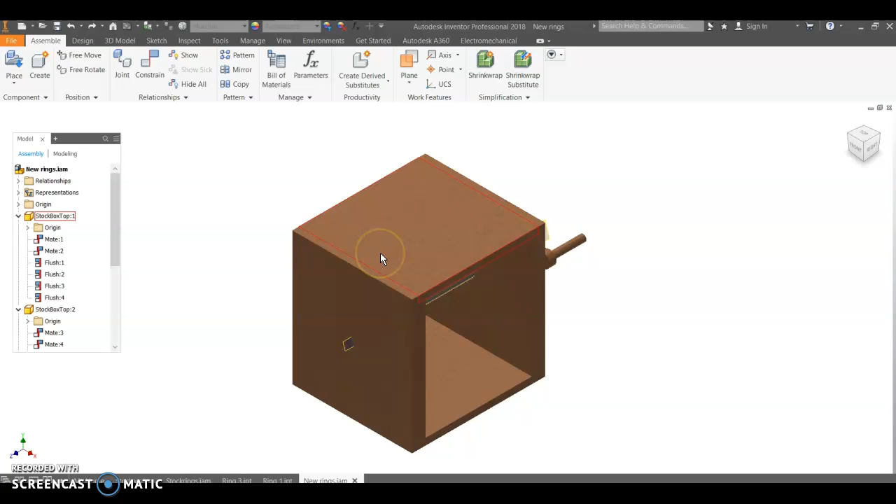Alright, welcome guys. I'm going to set this one up for both the caterpillar and the rings here. I'm going to add 7 holes along the top here, and then I'm also going to add 7 planes along the shaft running underneath, running through the middle, that line up directly through that.

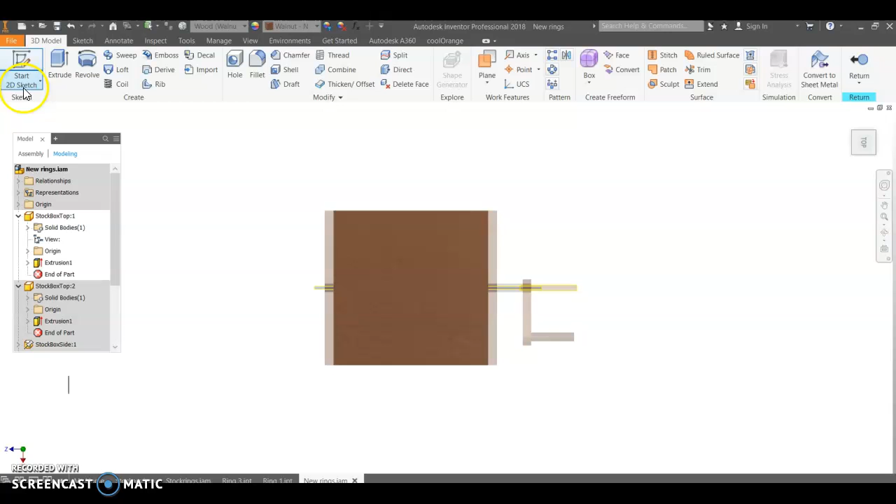In my box here, all I do is double click on that piece right there. That means I can work on just that, and I'm going to start a sketch right there. So that's lined up in the middle. If not, I'd come and find the center - that's 2.5 inches over there. I'm going to go ahead and start putting in some circles.

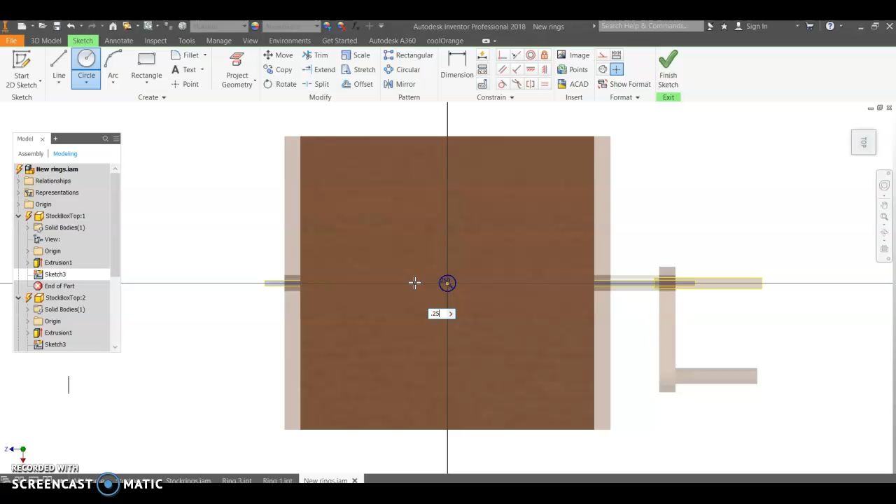I'm going to put in 0.25, enter. I'm going to come over here, 0.25, enter. I'm going to come over here, 0.25, enter, and right here, 0.25, enter.

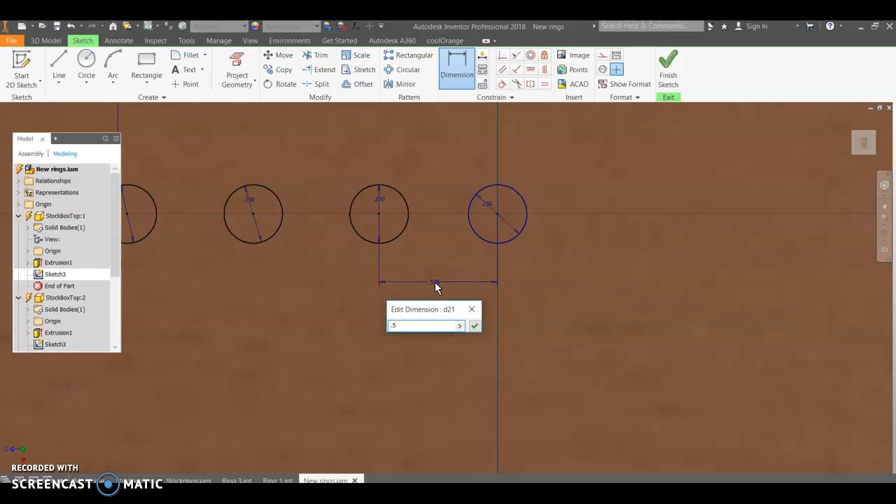I'm going to go ahead and dimension them up a little bit here. I'm going to space them - let's see, I'll put them 0.5 apart. From that one to that one it'll be 1, enter. From this one to this one, put 1.5, enter.

Alright, I'm going to go ahead and mirror those over to the other side. I'm going to mirror this one, hit shift, this one, and I'll put it across the mirror line here. Oops, it won't let me, so I'll come up here to the origin.

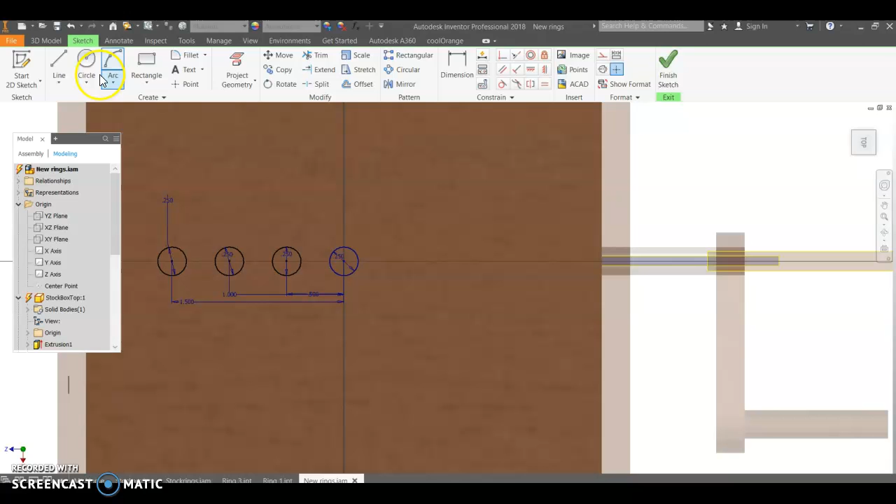Oops, cancel, hit done. I'm going to go ahead and put a line right here down like this, and then I'll go up and mirror this, and this about that line. Hit apply and done.

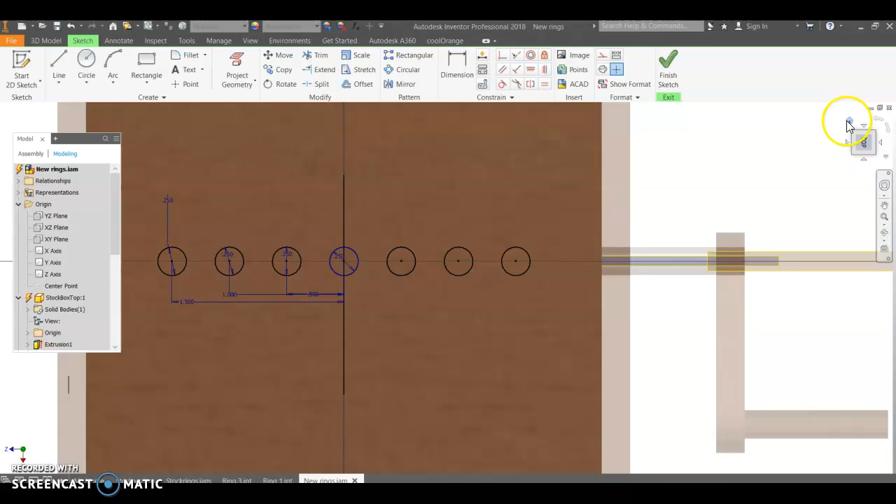Alright, now I'm going to go ahead and finish my sketch, and I'm going to extrude this one, this one, this one, this one, this one, this one, and this one. And I come over here and hit cut so it goes through them, and hit OK. So now I have those holes properly lined up.

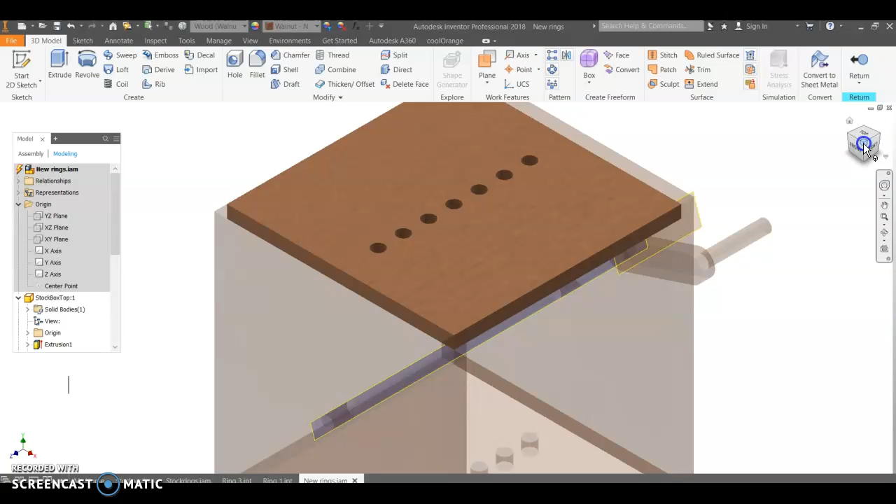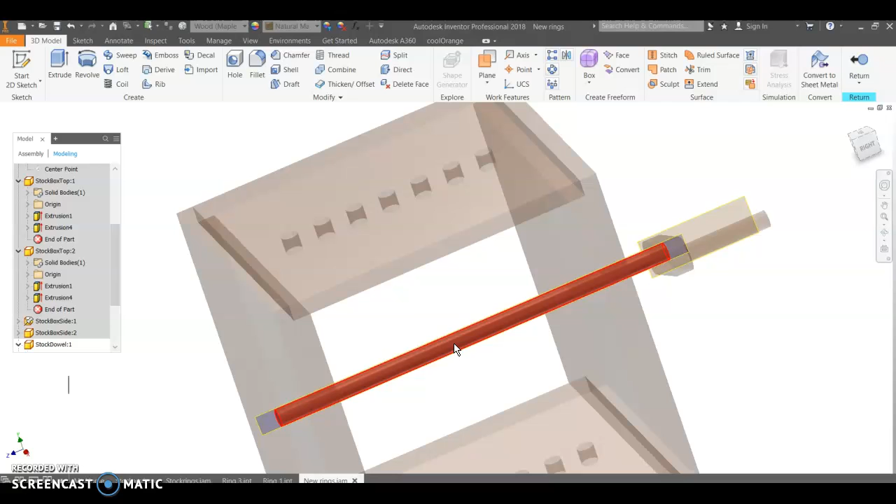I apologize about drawing the mirror line after the fact - I thought I could just use an axis, but it turns out I couldn't. Now what I want to do is go ahead and put corresponding planes that go directly under these, that I'm going to eventually lock the cams to, since I'm in here. So at this point I'm going to work on this, and let's see, I'm trying to think of the easiest way to add planes here.

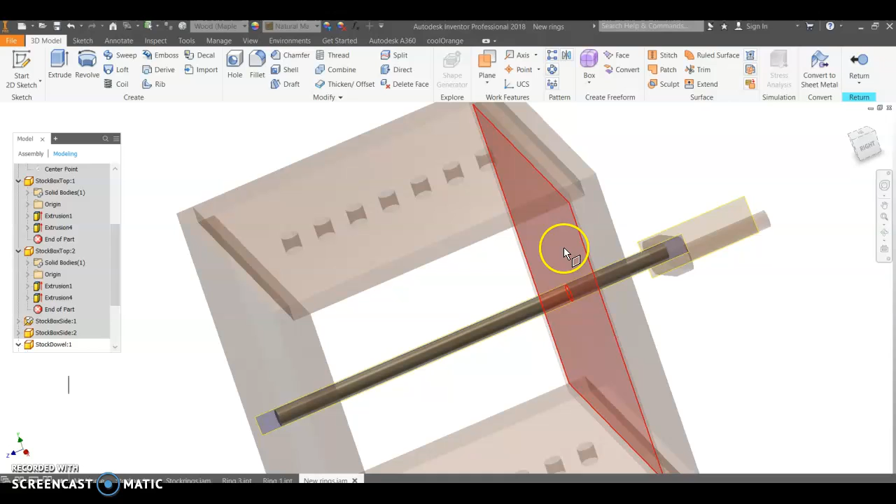I can do a little bit of mathematics in my head here and go quarter. So I'm going to add a plane offset, and I'm going to offset it from this plane. I'm just going to use, I'll come a little further, 0.5, and that one is perfectly underneath that.

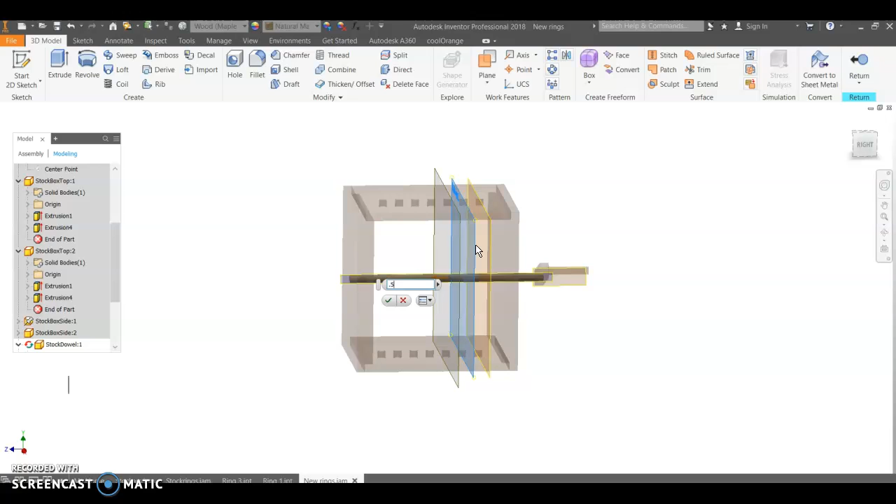I'm going to hit there, and now I'll do that several more times. Offset from a plane, 0.5, enter. Offset from a plane, 0.5, enter. I'm sure there's probably an easier way to do this, but I don't know how, so I'm hacking my way through this.

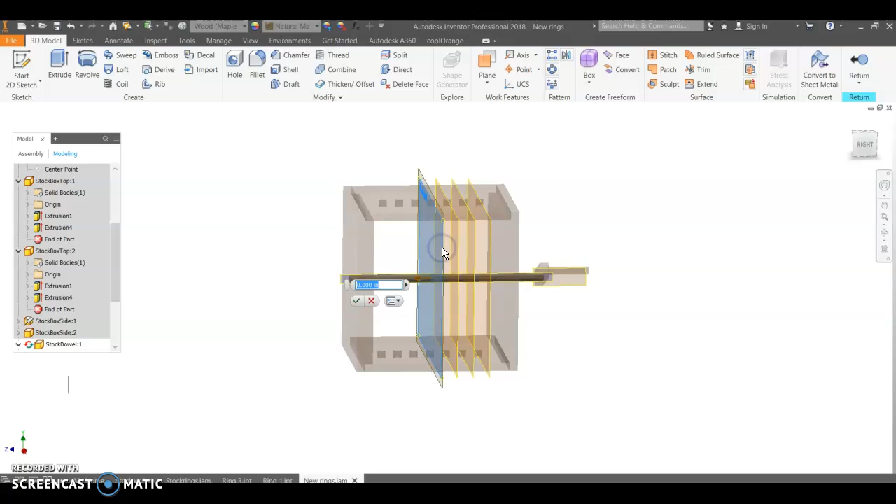0.5, enter. Offset from a plane, 0.5, enter. Offset from a plane, 0.5, enter. Let's see, 1, 2, 3 - gotta do one more. Offset from a plane, 0.5, enter. Okay, so I've got that.

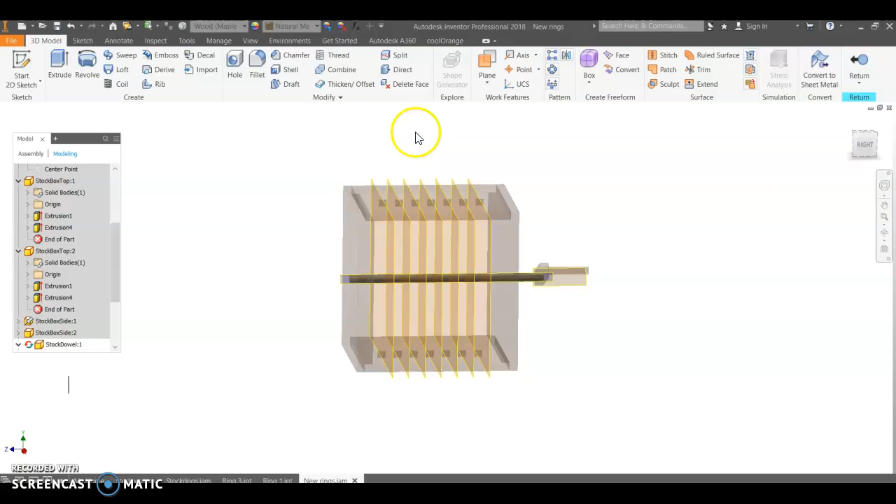Double checking I'm exactly right, and sure enough, those are directly below that, so that's going to come in big. So I'm going to go ahead and build a follower next, and then build a cam, put my cams on. I suppose I'll build a cam next and actually constrain them on, then add the followers here so that you can see the motions.